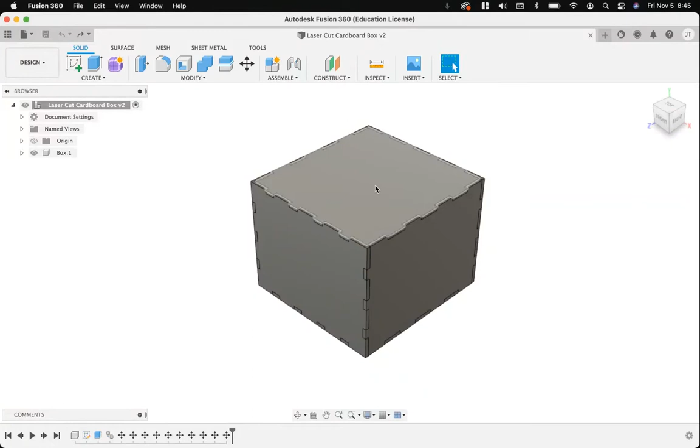And now, before we even go in and cut this out on the laser cutter, I want to show you a couple things you can do to make this a little bit fancier by putting text on here, by putting some pictures on here. So let me first show you how you can put pictures on.

If you go into Google, I already did one here. I'm going to just put on the Steelers logo. And if you find a picture you like, as long as they aren't too complex, like an actual photograph, converting it is going to be taking up a lot of computing power. But it can be done, it might just slow down your computer.

So if you find one you like, you can save the image. I already have one saved on my desktop here, so I will just save that, and I'll replace the one I already have. Kind of go through - here's my picture.

If I go now into this program, or just actually this website, what you want to do is take this picture, which is just a picture file like a JPEG or a PNG file, and convert it into an SVG, which is a scalable vector graphic, kind of like what Photoshop or Illustrator uses. Also, it's what Fusion can read as a vector.

So you can really easily turn any picture into a vector by going to this website. There's other ones, but I like this one, PicSVG. And it does kind of what you see here: it takes a picture and turns it into an outline that you can then put in as a sketch.

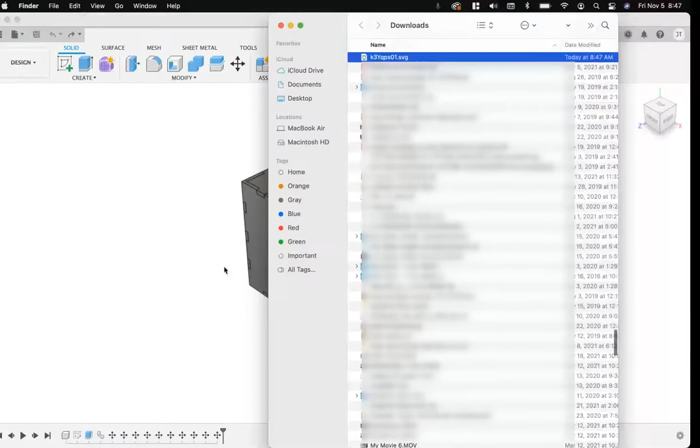Okay, so now basically I can go back into Fusion. Rather than making a whole new sketch, because remember, we want to keep these sketches flat, meaning we want everything that's on the sketch on the same sketch, not random different sketches, because then it becomes tricky to actually import - you'd have to do more than one step. So let's go back to the original sketch we drew everything on, and now we'll edit this.

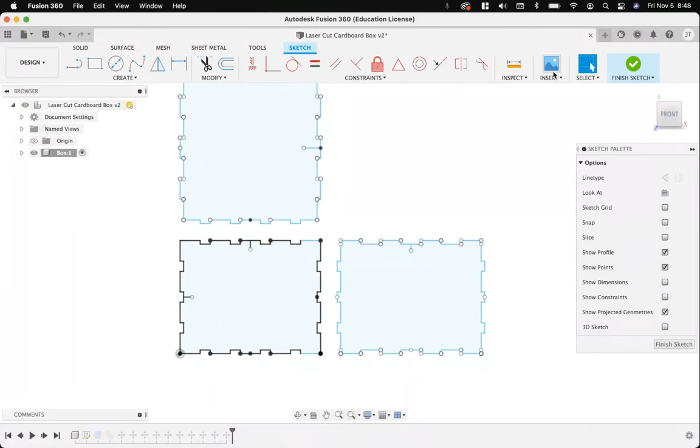So I'm going to go up here and insert my SVG. I'll go to my computer and get the most recent one. There it is, and you can see how this kind of comes in just as a normal looking sketch.

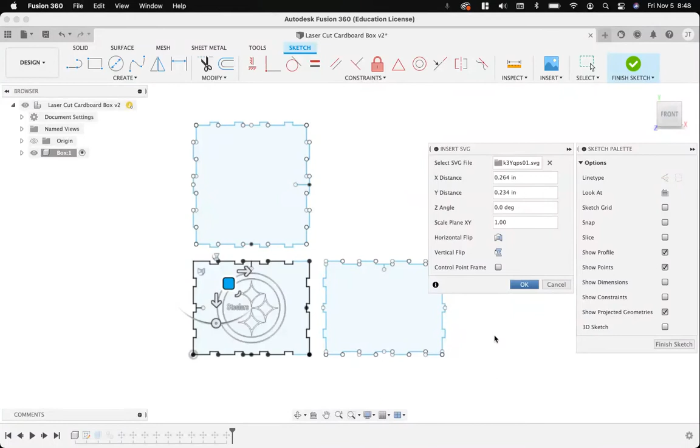It's pretty awesome. Okay, so we can scale it right here. I'm going to kind of put it in the center of this, more or less. Good. Okay, so whenever this is done, you're going to see it comes in as a green shading.

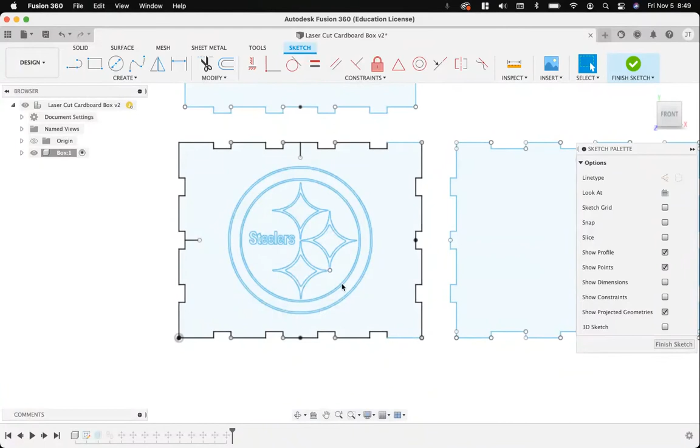If you select all this and then right click, you can unfix this. And this will basically turn that locked picture you put in there, or scalable vector graphic, into a blue sketch, which is just like any other blue sketch where you can move it around and manipulate it and do some other things to it. So I do recommend once you import SVGs that you convert them, just basically unfix them. Okay, so we can either cut this now or we can engrave it.

Let's go now and put some text in here on the other side of this. I'm going to just drag it out and then I'll release it - or click it, I guess.

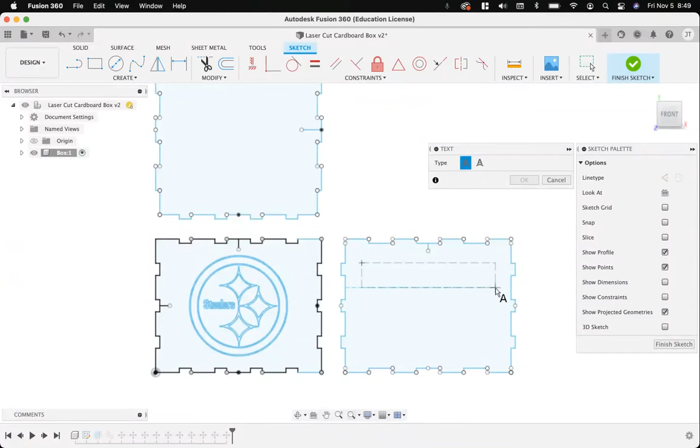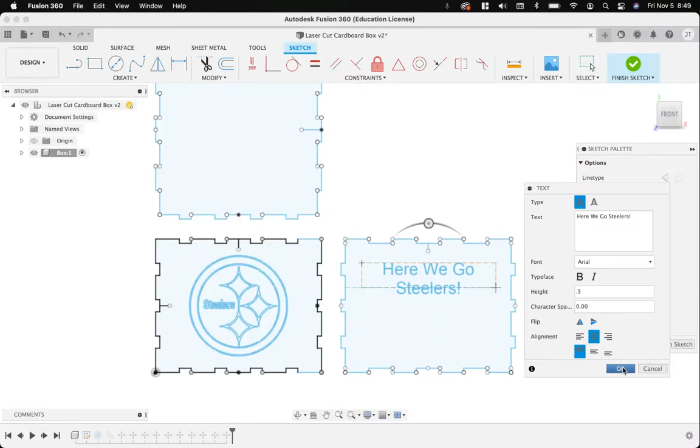I'm going to say, here we go, Steelers, which is something everybody chants at the games. I'll make this centered, and you actually adjust the size right here, at least the height of it. I'm going to make this half an inch tall, and that looks good. Okay, so I got some text there now.

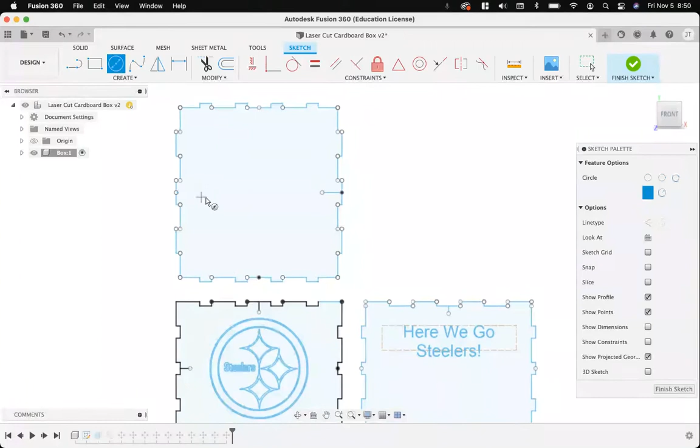And then the same thing - whenever this goes into the software for laser cutting, we can either cut this out or we can scan it. You'll see. And maybe now I'll just put a little circle right up on the lid so I can take my finger and open this thing up. I'll just do a 1-inch circle.

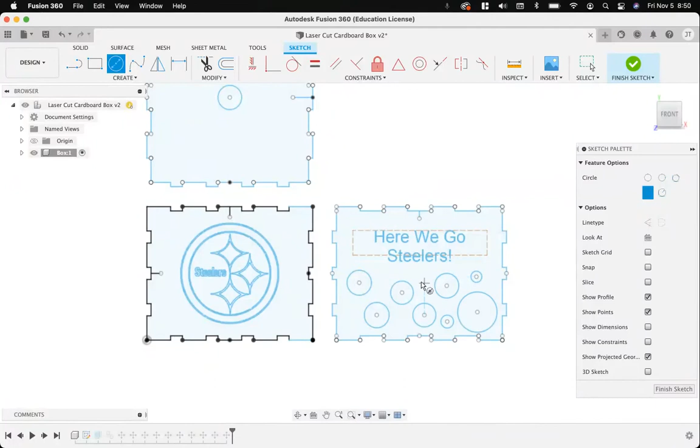And I'll maybe do some little circles down here too, just for decoration, rather than just having a normal side there. I'm just going to put a little bit of small little circles, just for decoration. You can do any kind of shapes, splines, or decorate this however you'd like. So now that's fine for me.

And that is it. So I'm going to show you now - this is done. So we can finish this sketch. What I'm going to end up doing, I'm going to go back and open this up. I'm going to hide the bodies.

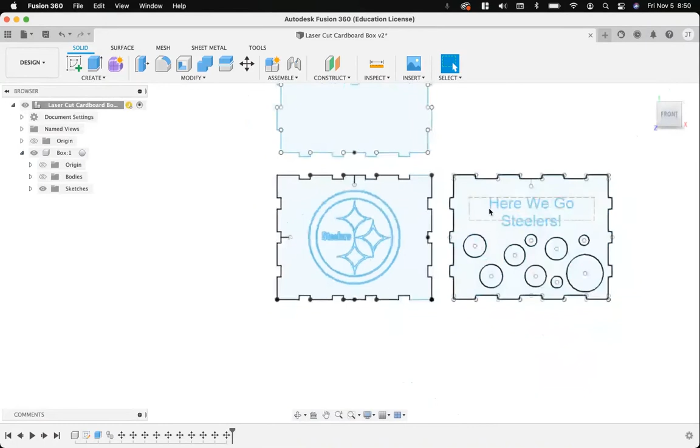I'm going to show the sketch - just one sketch there. It's perfect. If you were to make these as different sketches, you would have to import each sketch separately.

First thing though, we need to save as - sorry, not as SVG, we already did that. We're going to save this whole sketch. Right click, save as a DXF. A DXF is basically what the software for the laser cutter will read.

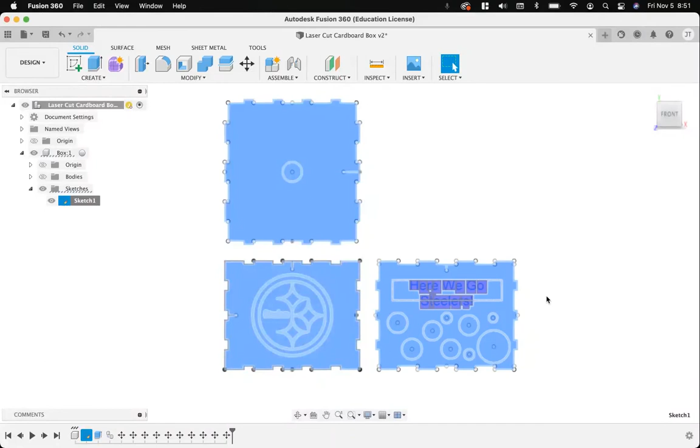So I'm just going to call this 'laser cut cardboard box', and I will save it. I already tried this, so I'm going to replace it. And that is it. This is now ready to be opened up in the Boss Laser software.

That'll be the next video. And then in that video, I'm going to show you how to actually set up the speeds and the power of the laser, also how to do different kinds of cutting or engraving. But basically, this is the whole process of CADing a little box like this, adding in some little pictures, making sure it all fits. And now we're done.

Now we move on to the fun part, which is actually making this thing, taking it from a two-dimensional model and turning it into a three-dimensional thing you can hold in your hands.